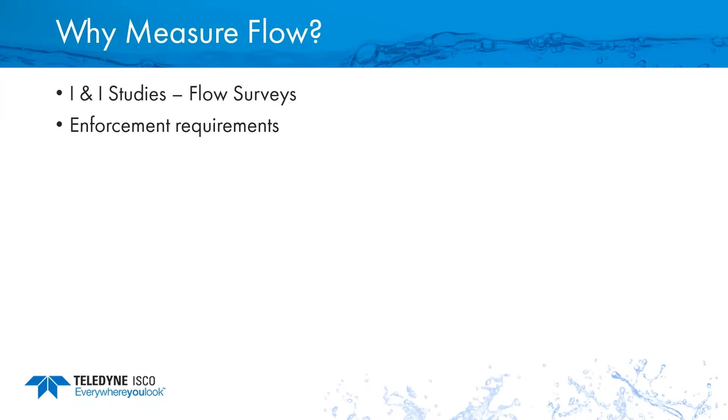Another one, enforcement requirements. So industrial pre-treatment, we see that all the time. I'm going to put an industry here, and I need to pay for that water that's going to be treated. So billing accuracy also for water custody.

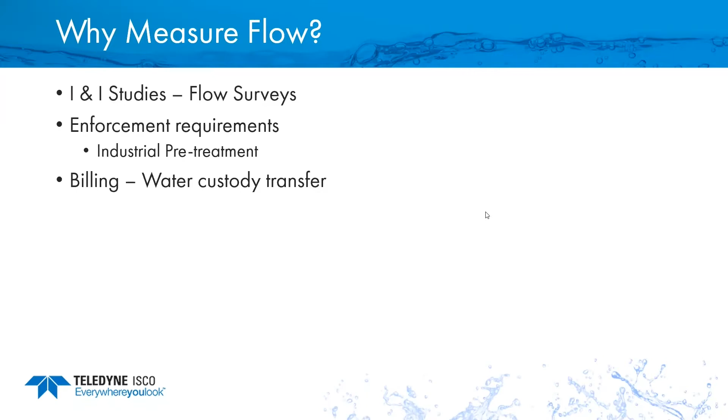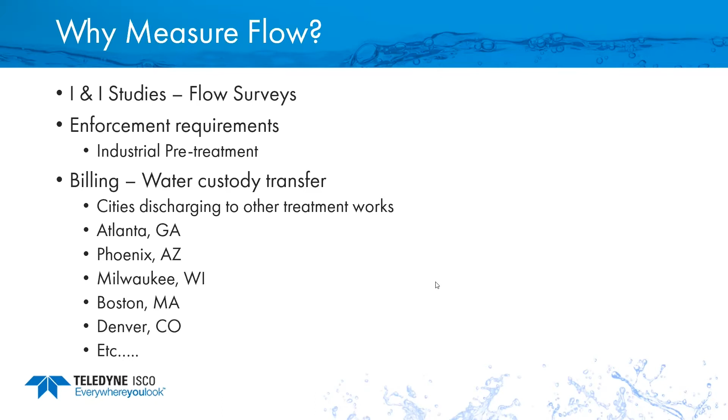So here we're discharging water to other treatment works. So a lot of cities do that, that's very common. Atlanta, Phoenix, Milwaukee, Boston, you name it, Denver, and the list goes on and on. So somebody's discharging water, somebody has to treat that water, they're paying for it. So the more accurate they can be, the better off for everyone around.

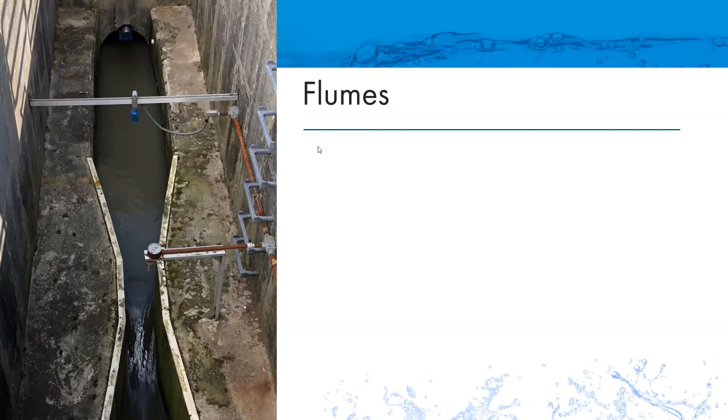So what they're doing is, when everything is good, no problems, their flume is accurate. When it's not good, due to a surcharge or plugging or blocking of that channel, then the flow is not going to be accurate. They're going to end up paying for that.

So flumes a lot of times are used in pre-treatment applications where you do have a wide range of flow conditions. And because of that, you might have to have the ability to measure very low flow. And in that case, you can have blockage or plugging in that throat of that flume. So you may need to clean that. I've talked to people that said they clean their flumes every week. So that's a fair amount of maintenance if that's true, and you have to do that.

So this is a big one, surcharged flumes or submerged flumes. More and more common. People designed based on what they knew from years ago. And now the flume can't handle the amount of water that's going through there. So we start getting some surcharge conditions.

Now, the one advantage of a flume is that it really only needs a level measurement in order for it to give you an accurate reading. So very easy to do that. You just stick a ruler down in there and you get a reading and away you go.

So provided everything is good on the flume side, as far as the installation is good, there's no inaccuracies of the elevation of the flume, and the approach section's good, and we don't have surcharge downstream. All those conditions can affect it. So if those are good, then everything is good. Flumes have been around forever, and a very good way to do it, but they're not infallible. And sometimes you could run into some issues.

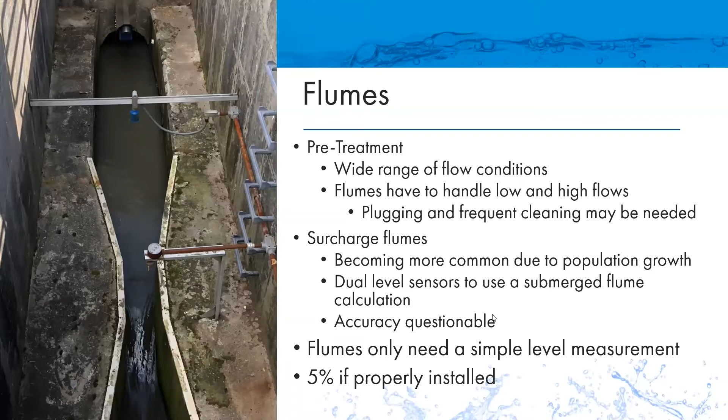So in this case, they have a laser upstream. They're measuring the flow with both. When it does go under surcharge, then they would switch over. If the flume is properly installed, you can expect about a 5% accurate reading. So within 5%.

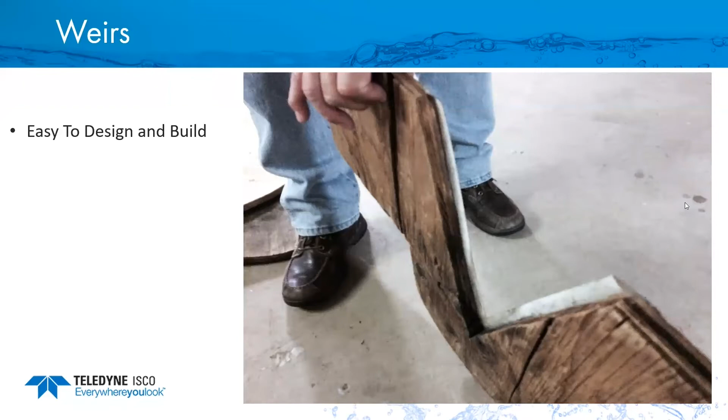So weirs. We see a lot of these out there. Weirs are very easy to design and build. So it's a very basic thing. It's inexpensive, obviously, a piece of wood. In this case, they have just kind of a stainless steel face on it. They're going to be reasonably accurate. If a weir is installed correctly in the correct location, you could expect, again, roughly in the 5% range.

These can be tricky to install depending on what they're doing here. In this case, these guys were installing in an actual manhole, which is going to be very, very challenging. It's going to also dam up the water. So now you're putting a dam in the flow and you're backing it up. So not typically desirable in sanitary lines.

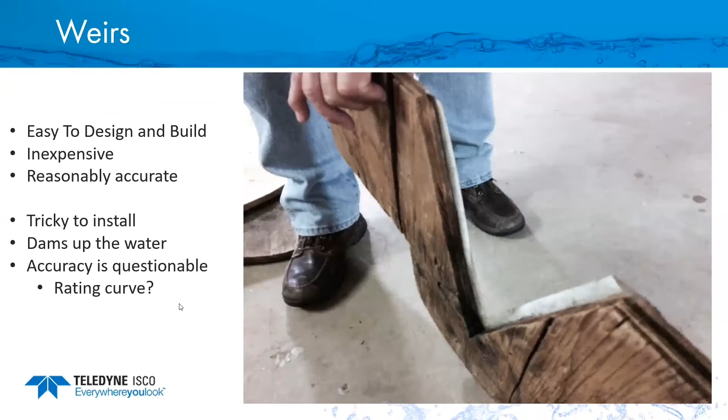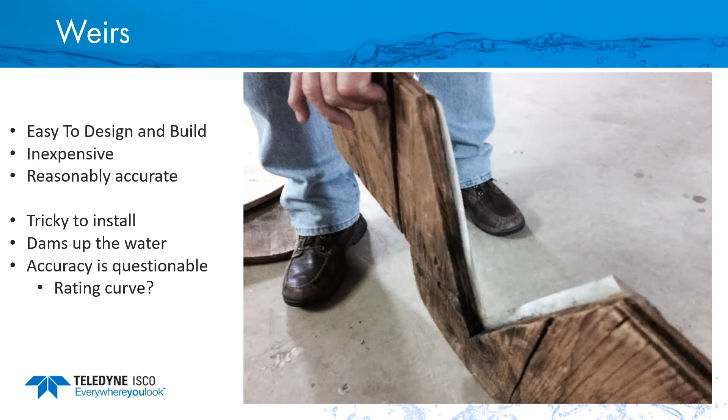Accuracy is going to be questionable. What rating curve are we using here? So this doesn't really match anything that I would look at from the ISCO flow handbook. So again, bottom line, we take a level measurement for most of these devices. Once we know the level, we can look at our ISCO handbook, make sure we calculated the flow right, that it did the math correctly.

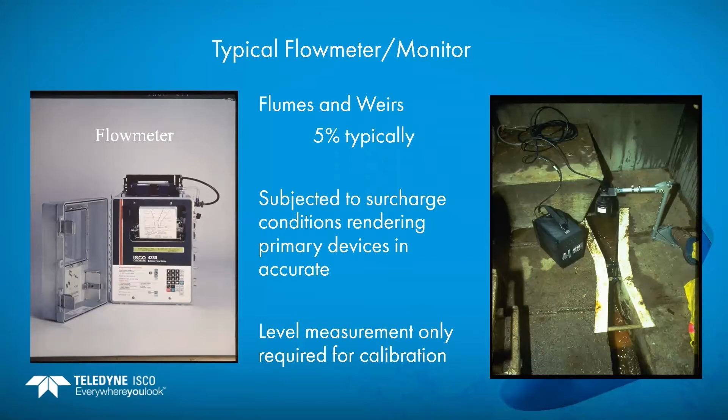And what those do is they wake up, they take a reading, they store it, they go back to sleep, and they don't know what's happening until the next reading interval. So these are a couple different styles that you may encounter over the years. And one thing again that is very popular is they only need a level measurement if they have a primary device.

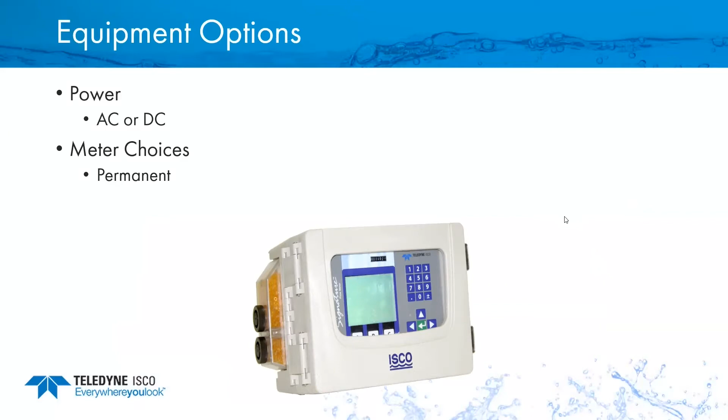So let's talk about some equipment options now. Obviously, you need to determine if you have permanent power or main power, AC, or are you going to run it on DC? What kind of meter choices are you looking at? Are you looking at a portable meter, possibly a permanent meter? Some people call those flow transmitters out there, a lot of different types of those as well.

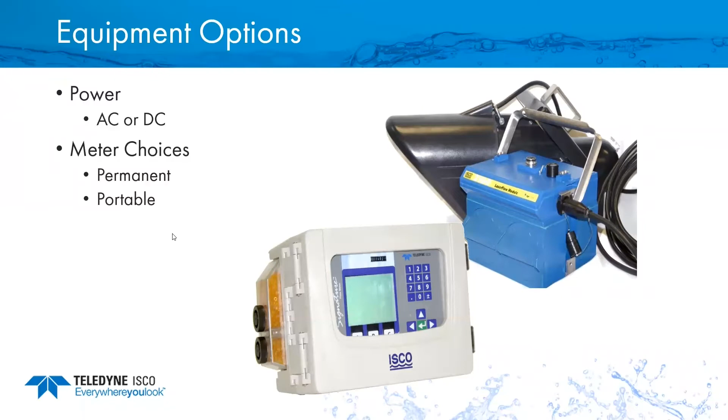And so again, looking at a flume or a weir primary device, very simple, and a level measurement is all that's required. So in order to maintain accuracy on that, you can just go around and verify that your level is correct. If your level is correct and the flume is installed correctly with the proper hydraulics, you should expect about 5% accuracy.

All right, let's talk about some of the more advanced technologies out there. This is the Flow Lab at ISCO, Teledyne ISCO. If you're ever in Lincoln, we encourage you to come by. We'll be happy to give you a tour.

This can run anywhere from 4-inch up to 24-inch pipes. We use this for development, really. When we design a new product, we run a million tests on it, and we want to make sure it does what we expect it to do. And this Flow Lab is certainly one of the advantages I think that we have to be able to run that. But we use it for training and different things as well.

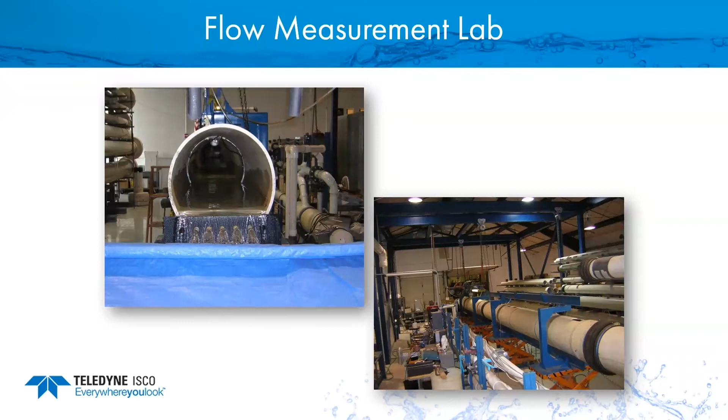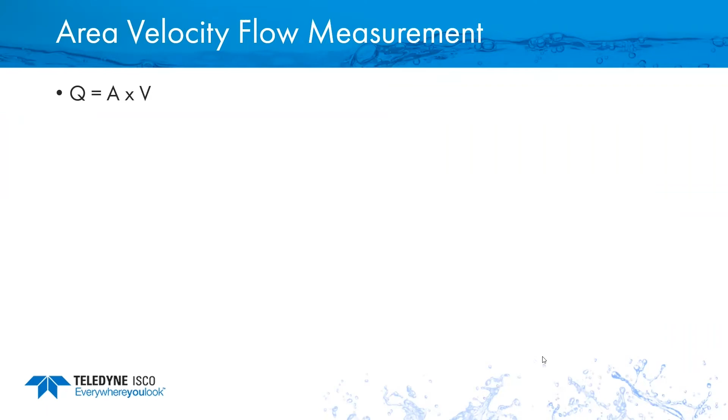But let's talk about area velocity, because that's one of the reasons we did come up with the Flow Lab, was we wanted to be able to develop a very good area velocity system. So area velocity, Q is your flow, is equal to the area, which is a level measurement, and that's done typically using a pressure sensor or an ultrasonic sensor. So for those of you that might be familiar with the 2150, we use pressure primarily with our stuff.

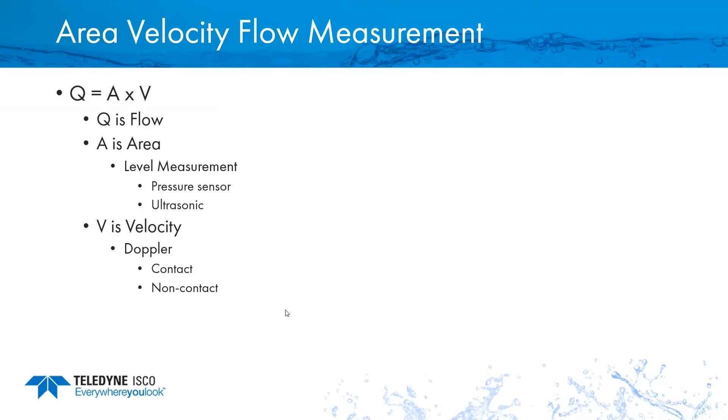V is a velocity component, and that's typically a Doppler type style or Doppler technique. There are a couple different ones. One would be a contact, which is a sensor that's actually in the water. Another one would be a non-contact. So we're talking subsurface, or I'm sorry, out of the water technique. So we may use radar, we may use laser or whatever to measure that velocity.

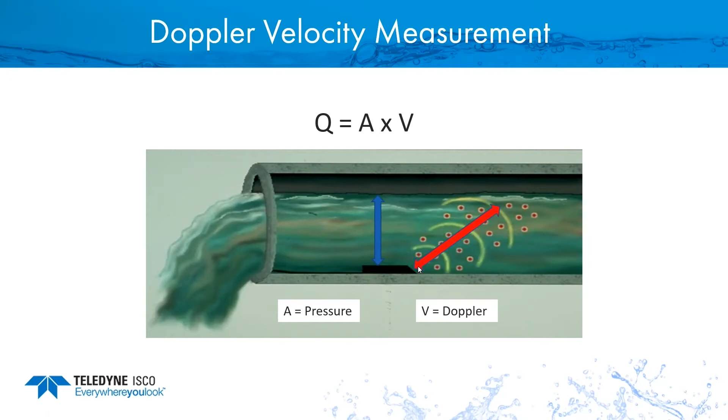Okay, so look at this, a little bit different picture. I kind of like this one because it gives you a better view of what this thing is doing. So you have a sensor that's in the flow on a ring. So it has a stainless steel mounting ring. It measures the water level. Once it knows where the water level is, we take a velocity reading using, again, a continuous wave Doppler style technique. So these are going to be very good for the most part, very accurate, but they have their limitation.

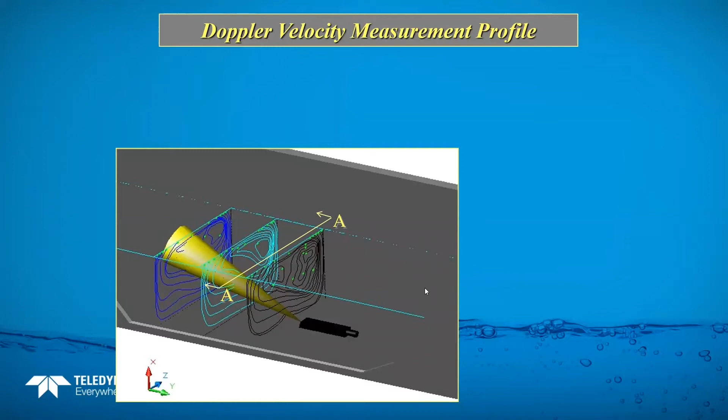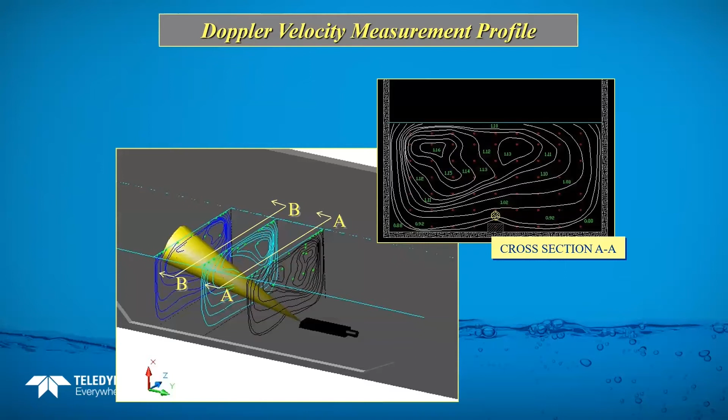This is a kind of a better view of something that a grad student did for me years ago in Italy. And I kind of liked it because it gives you an idea of what that signal looks like. So when it's transmitted out the nose, it's a fairly small, tight point or tight beam. As it gets further away, that beam gets bigger and bigger and bigger. So as a general rule, I would say we're looking at roughly basketball size, depending on the depth of flow.

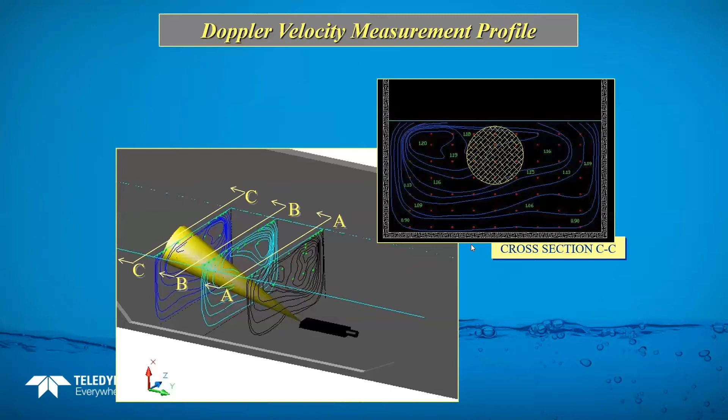With an area velocity, what I would expect to see would be something in the 5 to 10% range, depending on how deep the flow is. So if it's within 2 feet, you're probably going to get in that 5 to 10% range. So let's look at what does this thing actually see. This is kind of a good shot too of what we would call a Doppler signal coming back. And this is a return spectrum.

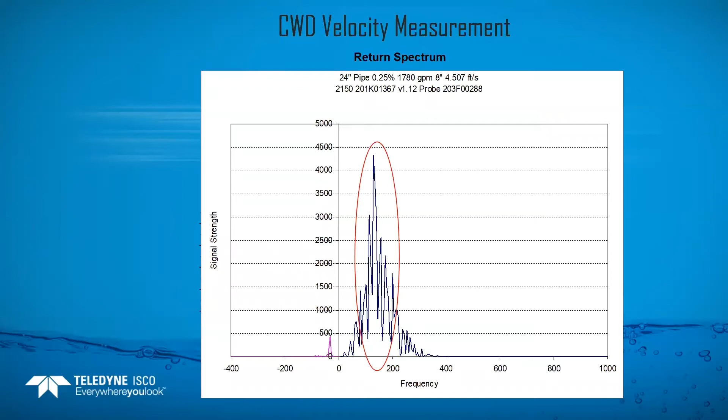So if you look at this, what we do is we transmit, we sample that return signal, and then we take what's left, we trim off the front and back end of it, and we calculate the average velocity for that point. So this is a good way to do it. Again, it will do very well. As you get deeper and deeper flow, you will tend to underestimate the velocity with any technique like this because it just cannot see up into the flow like a different device might.

These readings are all stored in memory. So we store what we call signal strength, spectrum strength, and spectrum ratio. We have a very, very good white paper that is available to you if you want it. I'll be happy to get it to you, but it will give you a good description of what I'm talking about. And you should be able to just go online and download that.

But this is kind of a cheat sheet that we set up for a customer one time. And they wanted to be able to look at this and kind of get an idea of, okay, if my signal is 20% and my spectrum is 10, I'm in the E category. E means I have a weak signal, spectrum strength, poor application, data is suspect. So ideally you want to find a different place.

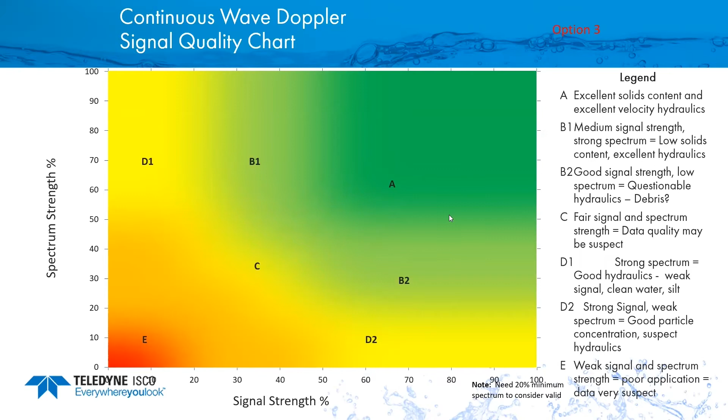So kind of a neat, nice little cheat sheet here for you to be able to determine if my application is good or not. Okay, so some of the most common mistakes that we see, the most common is a really bad application. Nothing's going to work. So you can't make everything work in every application. So if you have something that's ridiculous, water's coming in from the side, dumping into a flow channel, nothing's going to work. And you really are just going to have to find a better site.

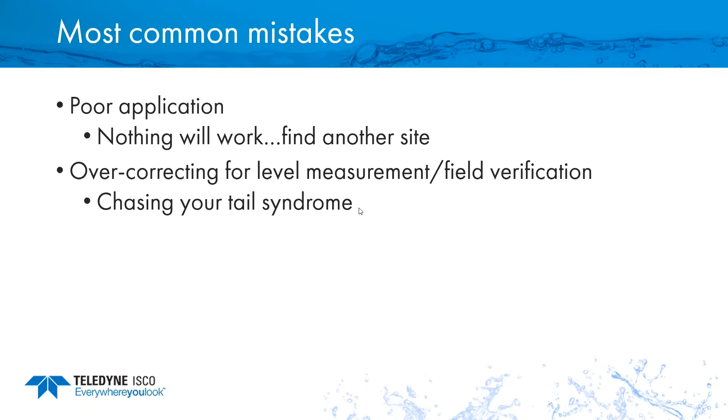Overcorrecting for level measurement and field verification. This is a big one. So people will go out and they will do what I call the chase your tail syndrome. You put every one of us in the world out in a manhole, we're probably going to get a slightly different measurement. So we want to be a little careful on how we correct for those level measurements and make sure that we don't, again, chase our tail.

Handheld velocity measurements. We see a lot of those out there. The technology is a sound one. It's typically electromagnetic, and those have been around for quite a few years. Again, very sound, but I would be careful that I use it any more than just kind of a sanity check. What you're going to see with some of the new stuff like the laser now and things like that is going to be far more accurate than anything you would be able to get with a handheld device.

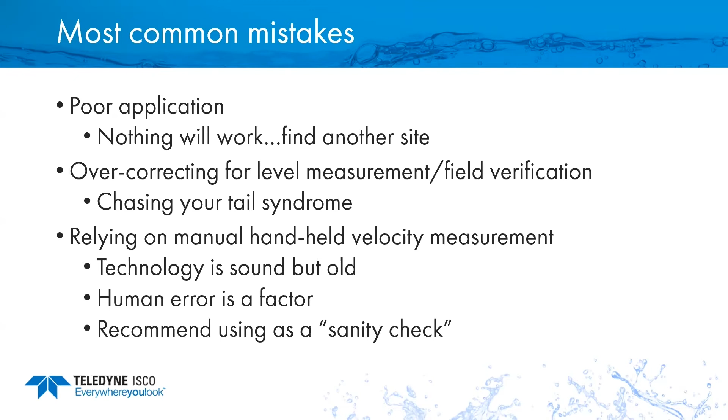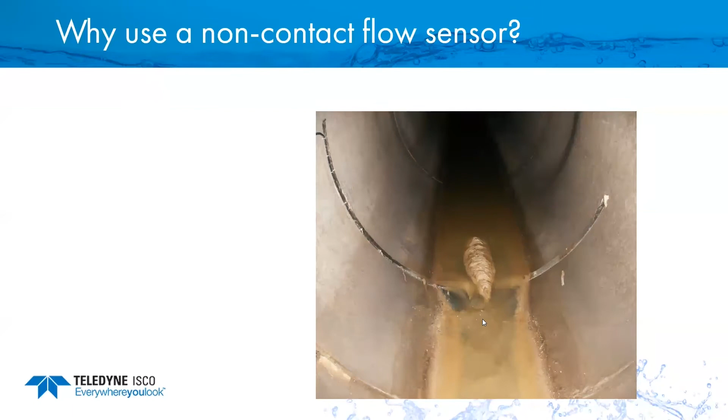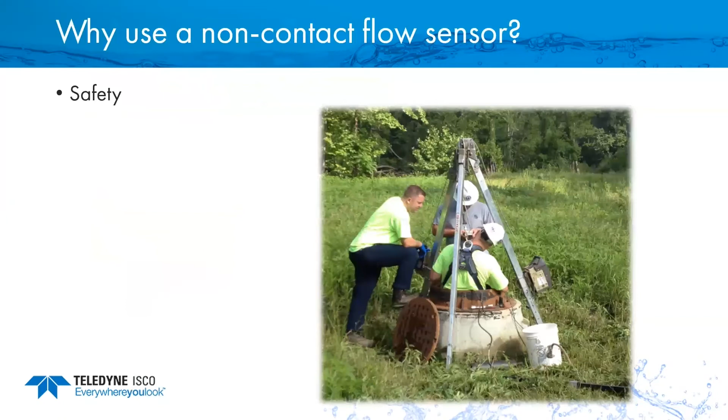All right, so let's get into non-contact. So why would we use a non-contact sensor? Obviously, right here's a very good example. We don't want stuff on a sensor. It doesn't matter who makes this, it's not going to work. So we want to make sure we don't have that. Safety is also a big issue. Nobody wants to go down in that manhole if they can help it. So we want to do everything we can to keep people out of those manholes.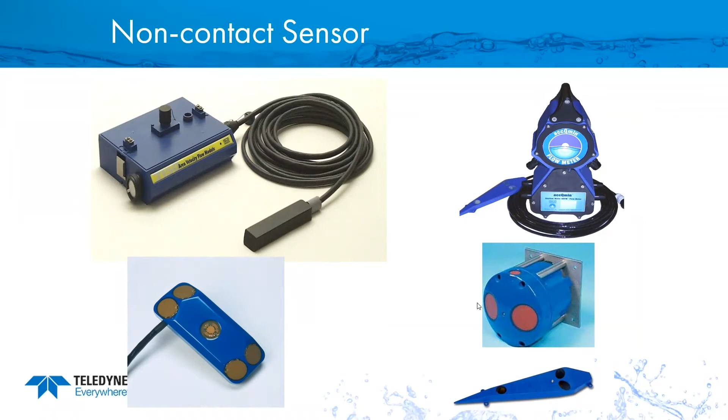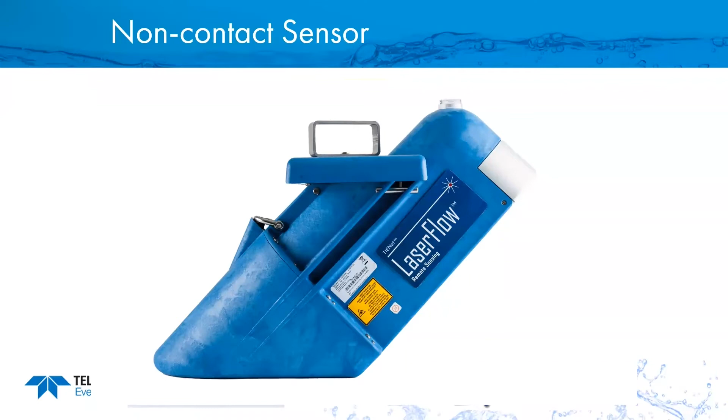All right. So what we want to make sure, though, is we provide the right product for your application. So when we look at all of these, we want to make sure, hey, is non-contact the best solution for you? Maybe it is, maybe it's not. So we want to make sure, again, that we evaluate your application and give you the right product for it.

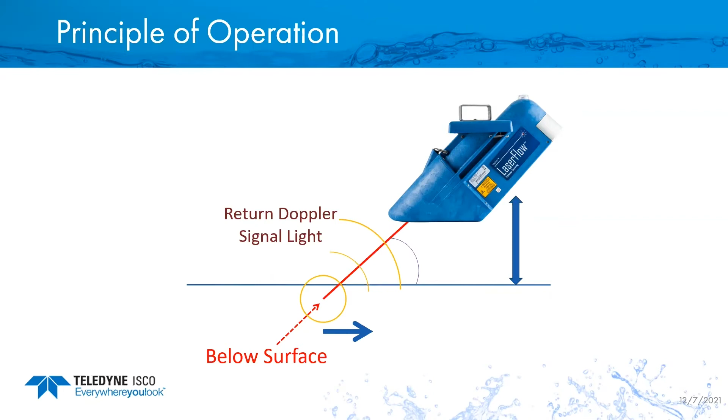So let's talk about laser and how it works. So you have a sensor that's in the back of the unit itself. It uses an ultrasonic to measure the level or the distance to the water. So it knows where the water is. Once it reflects off that, then it knows where it wants to focus the laser. So the laser is actually doing two readings. It's doing a level reading and it's doing a velocity, but it does the velocity subsurface. So it's below the water surface itself.

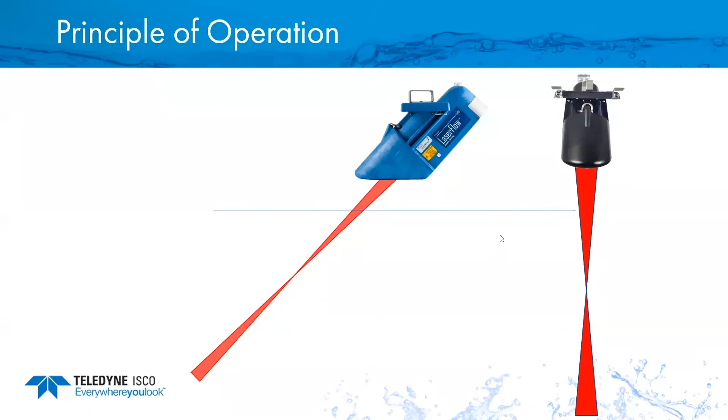Another little kind of idea of what it looks like. So if you look at it from the front view, side view, what you'll notice is if you stuck your hand underneath it, you'll see a dot the size of a quarter or coin. And where it actually takes its reading is a very focused point. So when I look at a laser on the flow, I want to make sure I have a very, very tight laser beam or laser point on that flow. That is known as converging section or point of convergence.

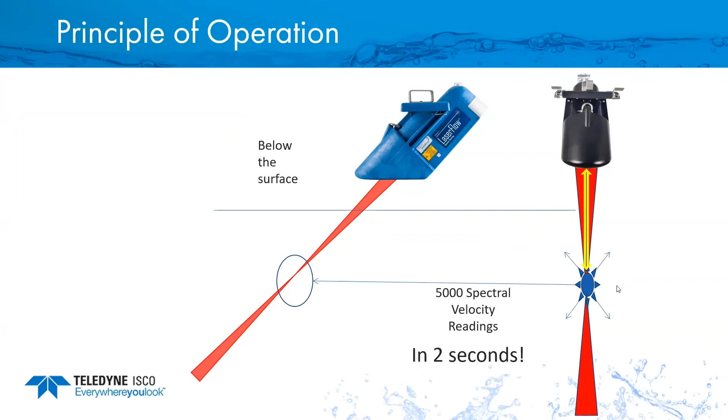And we take 5,000 velocity readings in 2 seconds. So to kind of give you a little comparison, a standard area velocity takes about 500. This takes 5,000. So it does it in a very, very short amount of time. This is some of the stuff that I look at. And this is the diagnostic that supports the reading that you're going to be getting.

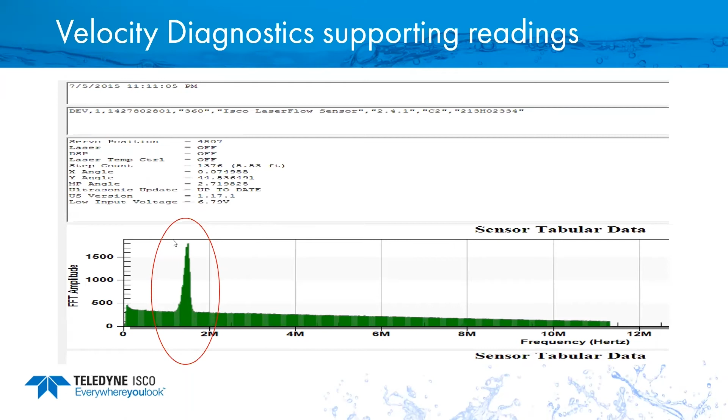And when you're looking at billing applications, this is one of the most important things to be able to look at to say, yep, we have a good reading, or no, we don't. It also would tell you if it does go underwater, if I have to do any maintenance on it. So right now I can see there's nothing that needs to be done with this unit itself.

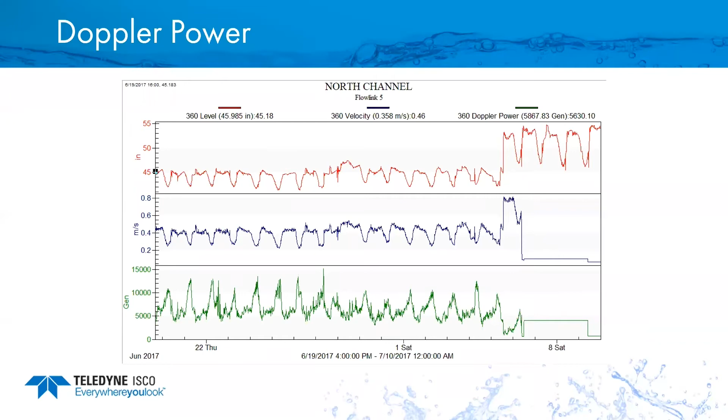You'll notice the level went up, the velocity went up, and now all of a sudden my Doppler power or my velocity both dropped. So that would tell me there's probably something in that channel that's either covering that or possibly surcharging that sensor. So again, very, very powerful diagnostic information to be able to use to determine if it's good data or not good data.

All right, so a couple ways to set these things up. One would be we do a level measurement. Once we do a level measurement, we're able to scan across and do up to 15 different points of velocity. So now I can scan across that and see each individual point. It does not do a complete velocity profile.

So for those of you that might be familiar with the old ADFM technology, it does not do everything that does, but it does a pretty darn good job, and it's going to give you roughly a loaf of bread is kind of the way I describe it. So if my hydraulics are very uniform, it doesn't matter. You probably don't need all these points. If you do have some irregular hydraulics there, you might want those.

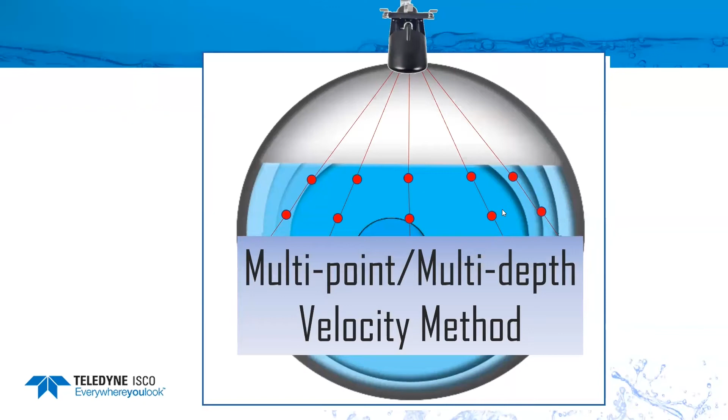It really is all about power. So power and time to reading. It's going to take more power and it's going to be slightly slower getting you those readings. This is known as a multi-point, multi-depth velocity method.

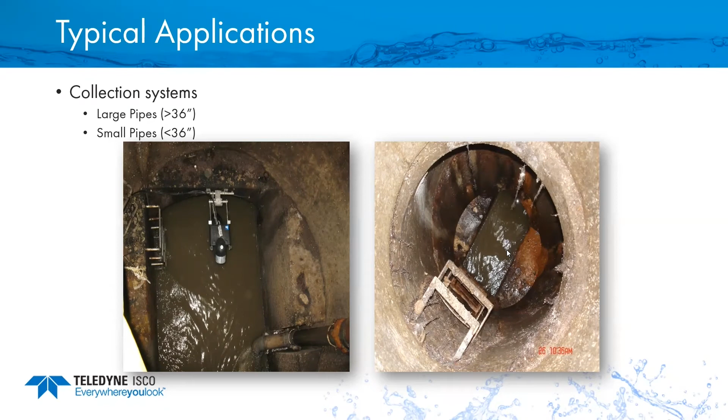So I'm going to show you some application shots of where we use some of these. Give you a little better look at some of these applications. So collection system is what we designed it for. We looked at what we called large pipes would be anything greater than 36. And then we decided basically a small pipe is anything less than roughly 36. 36 is still a pretty good sized pipe. But we designed it for both large and small, and we're seeing a lot more small pipe applications.

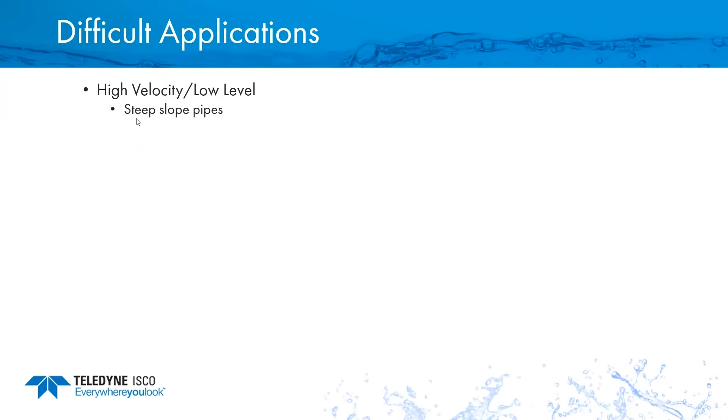Okay, so some of these applications we're looking at that are going to be very difficult for, let's say, a flume would be a high velocity, low level. So that water's coming down the hill, making a steep run at it. It's going to go splashing everywhere. So a flume is not going to work, where you might need a non-contact device such as a laser. So steep slope pipe, low level raw wastewater.

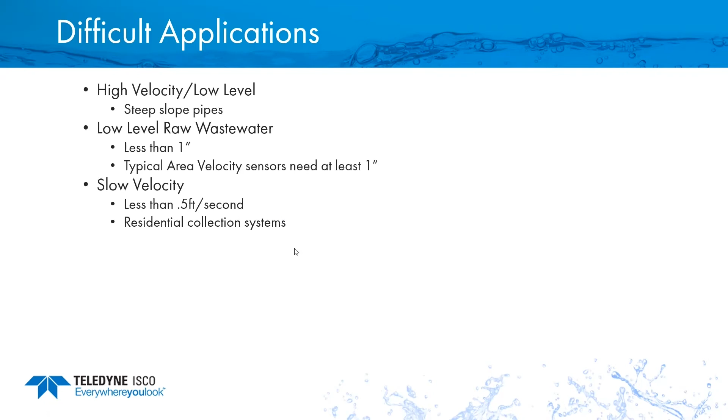So anything less than 1 inch is going to be very challenging because you just don't have much to work with. And pretty much every area velocity sensor that's in the flow needs 1 inch to work. Anything slower than about a ½ foot per second. When you get down below about a ½ foot per second, that you also will see a lot of times in residential collection systems, that is going to be very, very challenging as well.

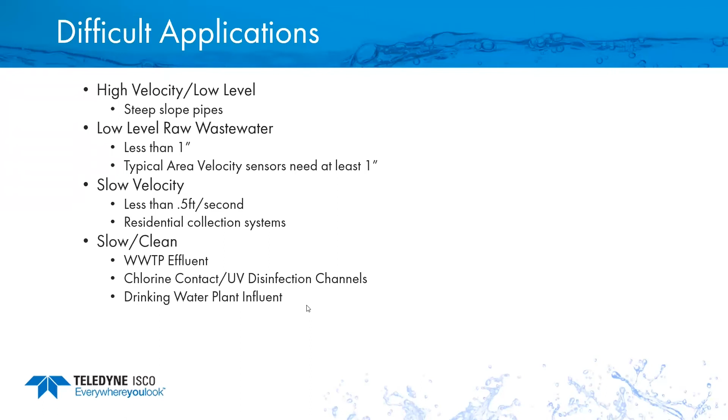Slow clean water effluent from wastewater plants that you might be getting billed off of chlorine contact or UV disinfection channels. Drinking water influent, that's another one that we're seeing more applications where they need to pay for the water that's coming into a drinking water plant. So it's raw wastewater or raw water. Stormwater, again, wide fluctuation in flow conditions. Something with an irregular shape channel is going to be very challenging.

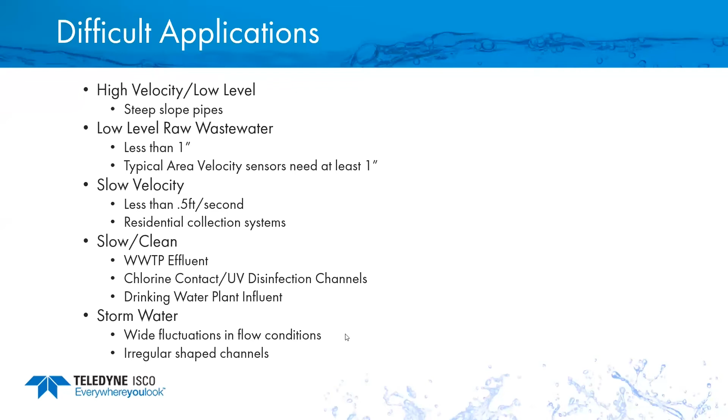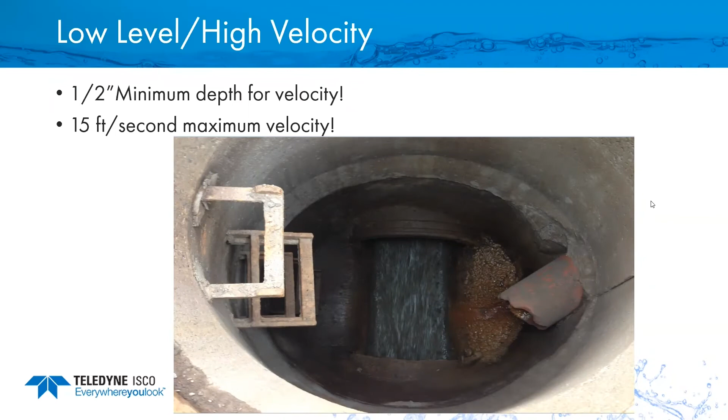So here's one where we have a low level, high velocity application. So this is one city that's discharging to another, and they have to pay for that. Well, this is a very, very challenging application, and really using a non-contact would be the best way to go for them. The typical laser and some of the other stuff you might see out there, roughly about a ½ inch for velocity, and can read about 15 to 20 foot per second, depending on what technology you go with.

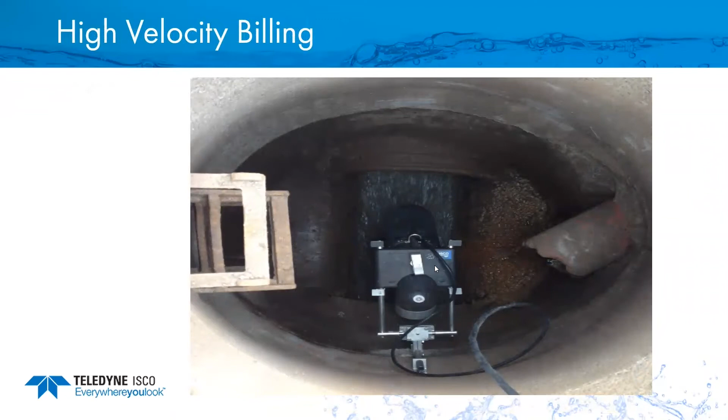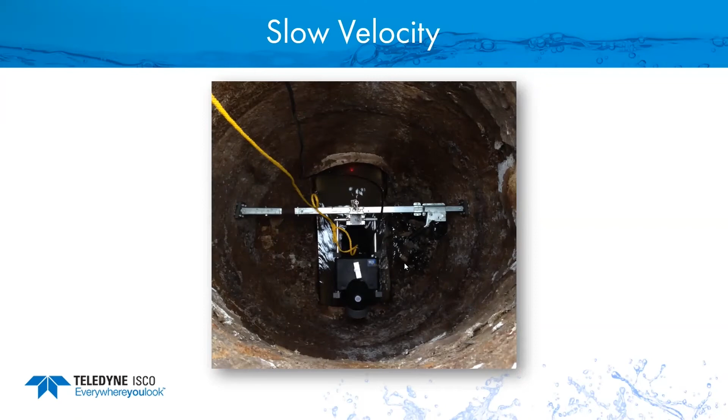So here is a good picture of one that's installed. It can be pointing into the flow or downstream, it doesn't care. But you can see that this would be a much more appealing location for a non-contact than something down in that flow. Another shot of one that looks like glass. You can see the surface is very smooth. This would be a very slow application, which makes it very tough, very difficult to be able to measure.

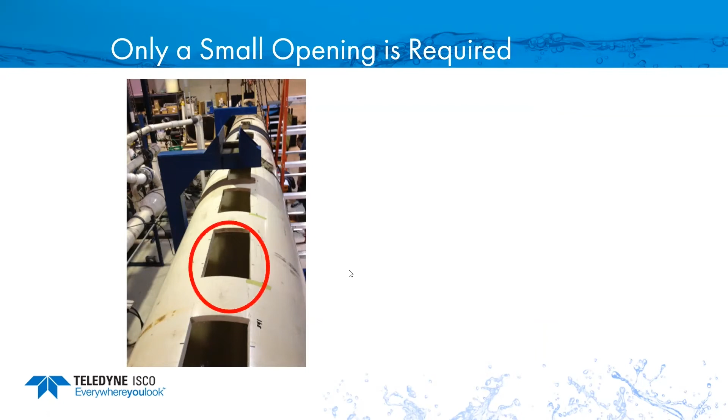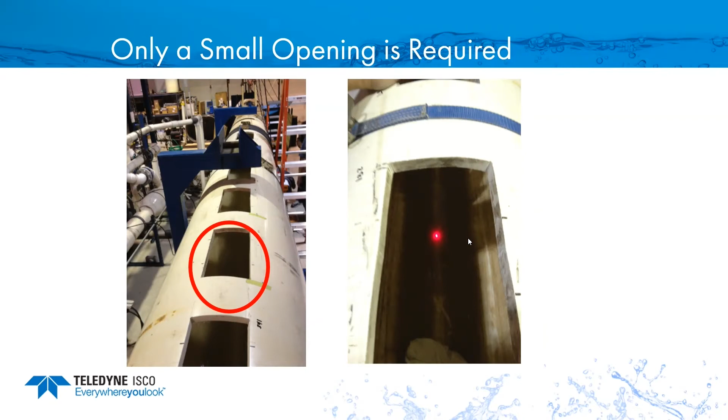Okay, so if I don't have a flume, I'm going to go area velocity. It'd be nice to be able to have it in a kind of a round pipe where I have just a small opening. So this happens to be the flow lab, so you can see where the opening is on the top, but this is where the laser is actually hitting. In the real world, this is a great location because now I have a nice hydraulic condition. I have a round pipe, almost full. I just have a nice little notch at the top.

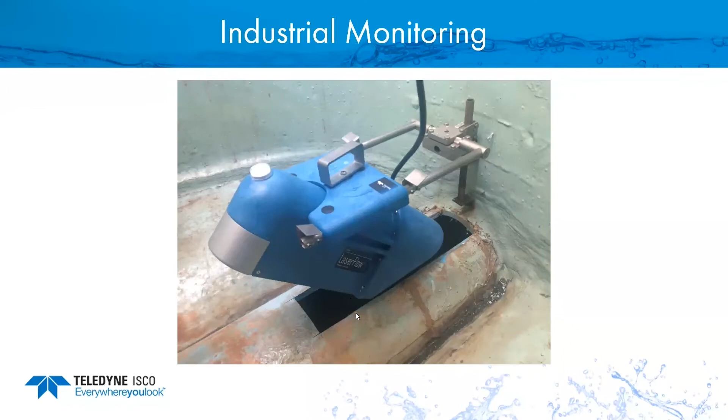The ultrasonic level is going to be read right below the handle roughly, and the velocity read right out in front of it. So this is a very, very good location. And ideally, if you can do this, this is going to be your best billing location or billing application. So again, industrial monitoring, you can see the laser on the flow itself, but anytime you can do this would be preferable.

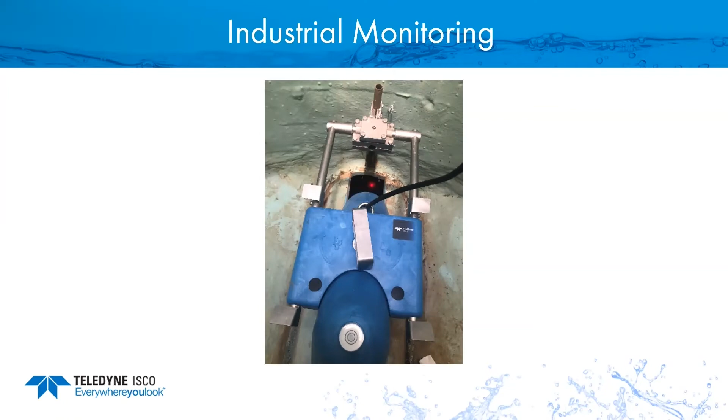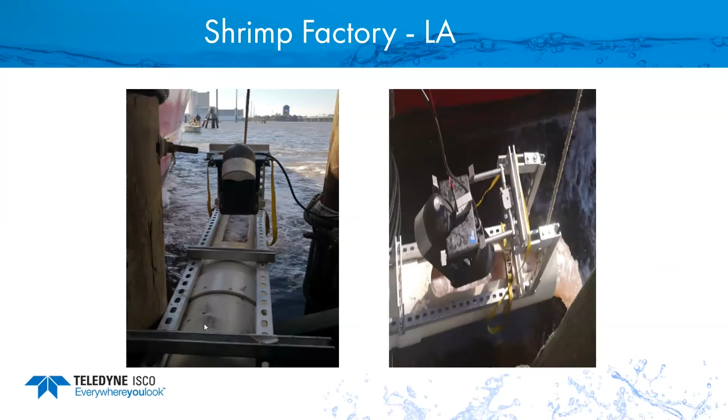Okay, here is one that's an actual shrimp factory in Louisiana that's discharging to the bay, so they have to pay for what they are discharging. You'll notice there's just a nice little opening in the top of this PVC pipe, shoots right out the end of that, and away they go. So very, very easy way for them to measure that flow.

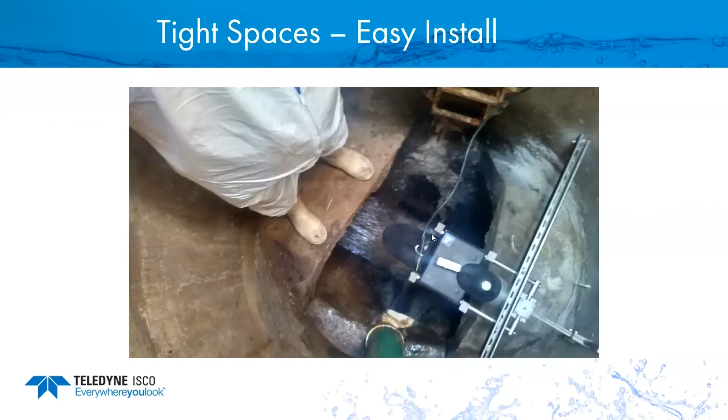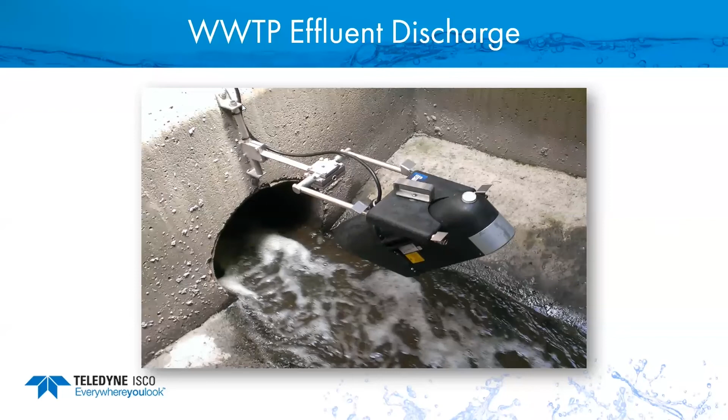Here's another one. This is an industry in Las Vegas, and they are discharging that water. You can see it's moving through there pretty good. So they didn't have much of an area to be able to install anything. So tight spot, but they were able to get the meter in there where they needed it. Okay, here is an effluent discharge, which again is a billing location for these guys. There's 2 bolts that hold the bracket right there, so it's easy to install something like that.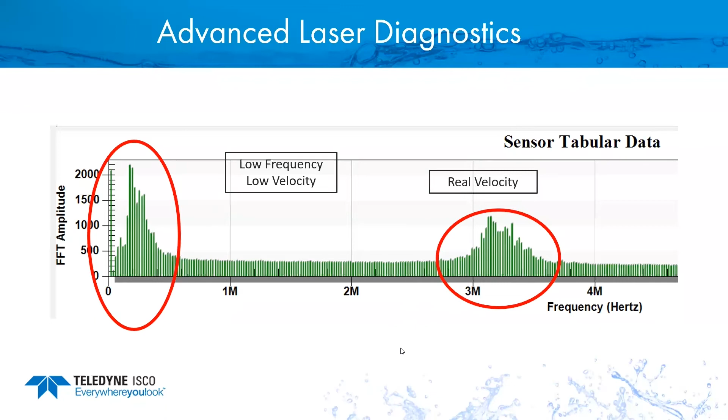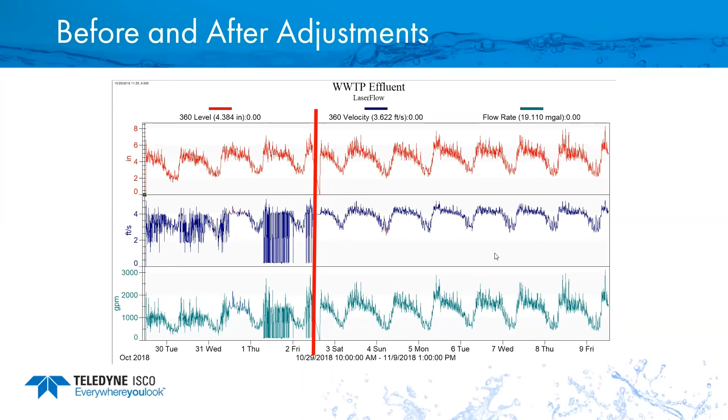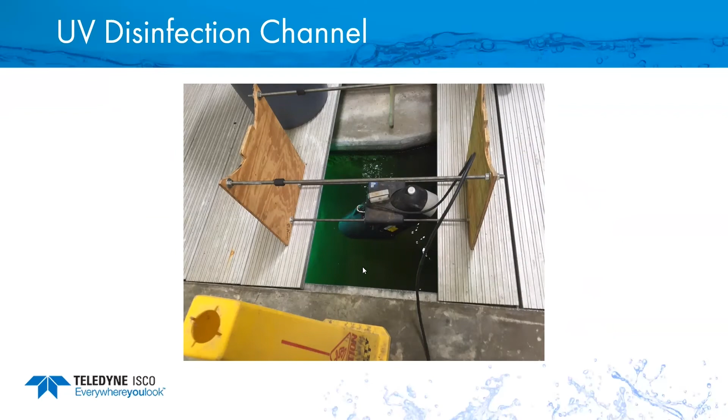Okay, here's one that's a very clean application, but it's a UV channel from one of the industries that was discharging, and you can see that water is very, very clean. So another one that's a difficult application.

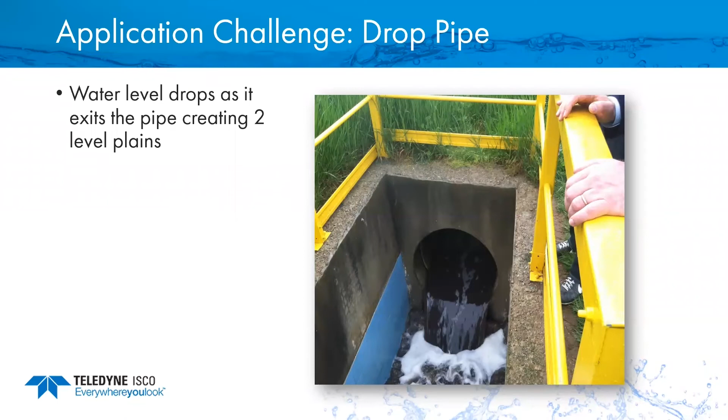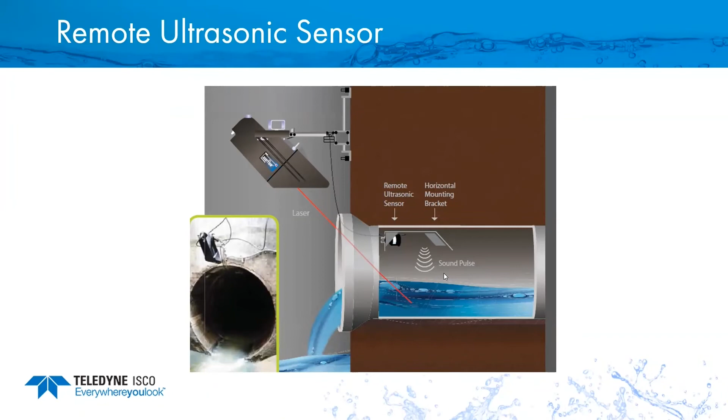Here's one where they had a drop pipe, so the water actually is creating two different levels. In this case, the laser would want to read where it's free falling out, and they want to read actually up in that. So that wasn't going to work so well. So what they ended up doing was getting a remote ultrasonic version of this. The sensor now is mounted horizontally and reflects off the water in the pipe. So now we're getting a much more accurate representation of where we're trying to take our velocity reading.

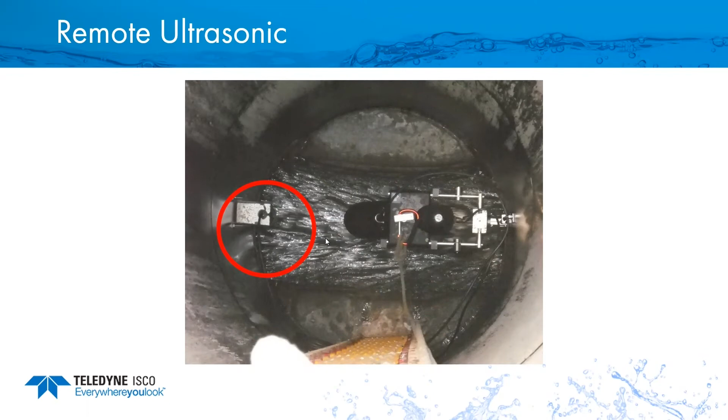Another application, which was very challenging because it's kind of coming around a bend, but they installed a remote ultrasonic in front of it. In this case, the laser is shooting down in front, where it's actually reading its ultrasonic level. So a good place for a very accurate measurement.

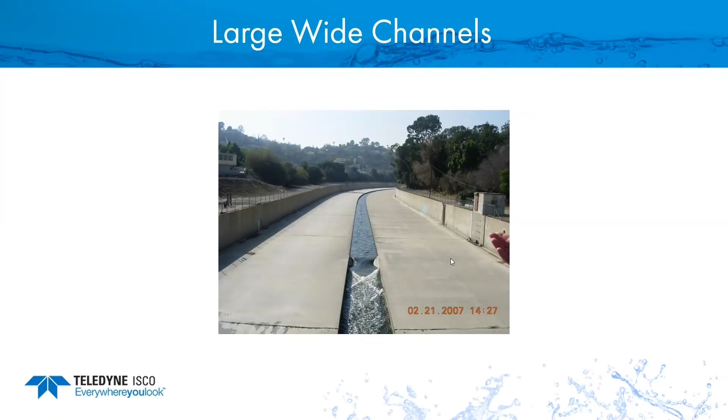Once it goes across that channel, then it becomes a little trickier. So now do you do multiple non-contact, maybe laser, radar, whatever, to get it out of the flow? That might be what you're going to have to do in that type of application. And again, you can kind of see how it narrows down, almost like a flume right there.

Okay, so we get this all the time. What kind of maintenance is involved? Anytime you're using a non-contact ultrasonic, you really shouldn't have a lot of maintenance. Periodically checking that level is not a bad idea, but it's really not a major thing. I would say monthly, quarterly, go out and give it a quick check. Again, velocity verification calibration is not required. If you have a handheld and you want to go check it out, that's certainly up to you. Not a bad idea.

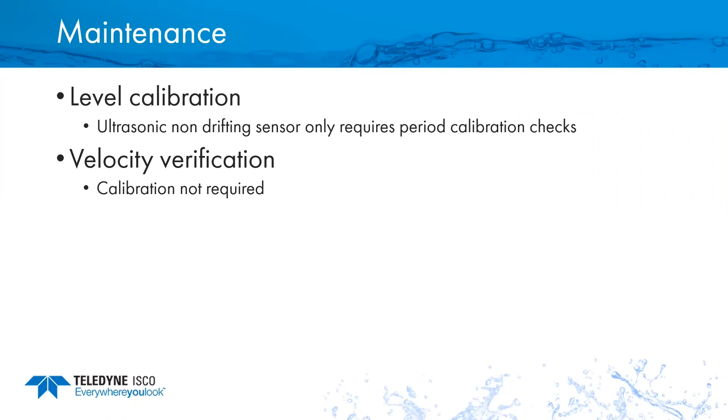I would just be a little careful that we don't get too crazy on that, because really the diagnostics, especially on the laser, will tell you how well it's working. We have tons of diagnostics on all the other stuff, and whatever equipment you get, you should look for that kind of capability, whether it's us or anybody else out there.

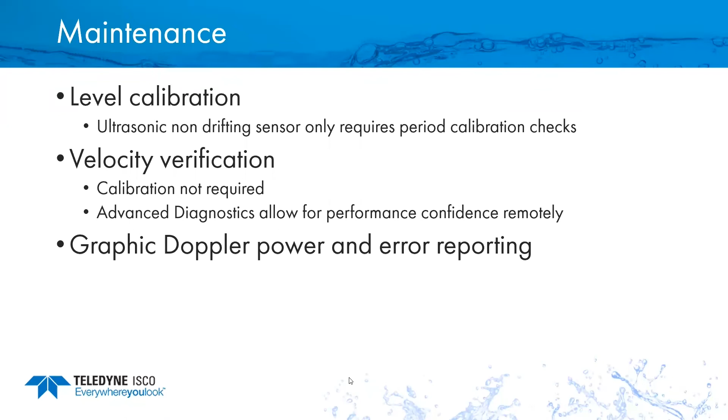And then some of the stuff that we're doing with the Doppler power readings and the error reporting are very, very beneficial when you look at that and say, can I bill for that? Again, a lot of money involved in billing, tons of money. You need to look at the technology that can help your meter performance and the accuracy. So how good is the data I'm getting? Well, the diagnostics will certainly give you that information. And then what are you looking for related to your flow meter? You need to understand that.

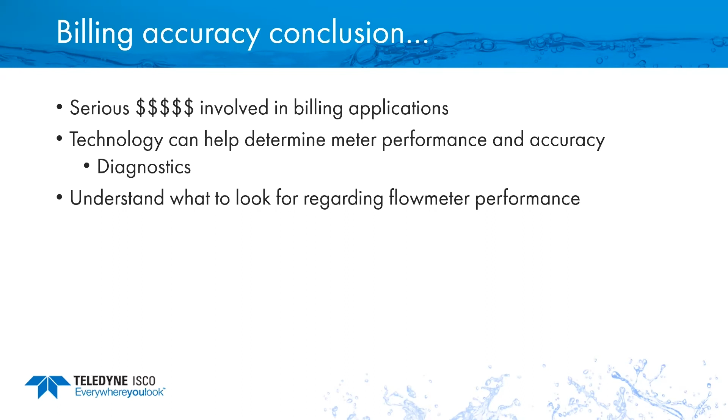We didn't talk about mag meters today, or closed pipe, because we don't work with those, but same type of thing. If you have a closed pipe application, maybe a mag meter or propeller meter would be a better choice for you. But look at what your expectations are. And then flumes, again, we see a lot of those out there, but not always perfect. You have flumes and weirs, they get dammed up, or they dam up flow. How much maintenance is that going to require? Am I going to be going out there every week to clean these? So determine what you're really looking for to get the best data.

And finally, select the right technology for your application. That might be an ultrasonic with a flume. That might be a non-contact area velocity system. Could be any of those.